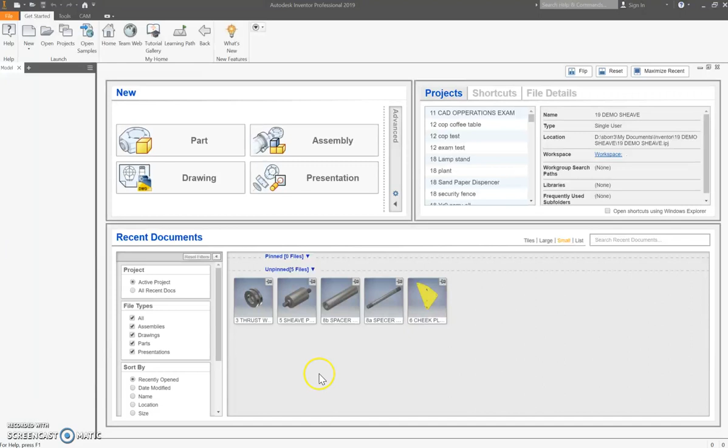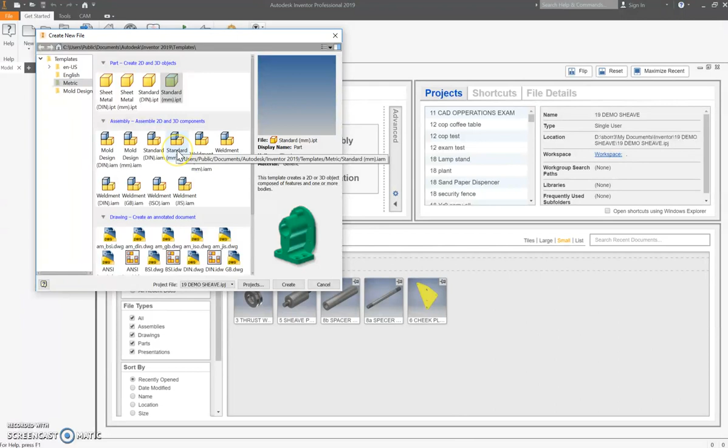Rightio, so we've got all our pieces for our thrust bearing and we need to put it together. So when we go up to New this time, we're going to skip down to the next section, which is assembly, putting things together. We're not doing a mold design, we are just doing a standard type of assembly. And like before, we had the millimeter IPT, we're using a millimeter IAM. IAM meaning Inventor Assembly.

When we come into assembly, you're going to get a few slightly different icons up here. Chiefly, you're going to have this assemble tab, and it will probably say place from Content Center initially. The Content Center is like a hardware store. It's got all sorts of nuts and bolts and bits and pieces you can use to put things together. In the lower half of that button, I can change to say I want to place items. So when you click on place, then it brings up your library in this project folder of all of the parts that you've been working on.

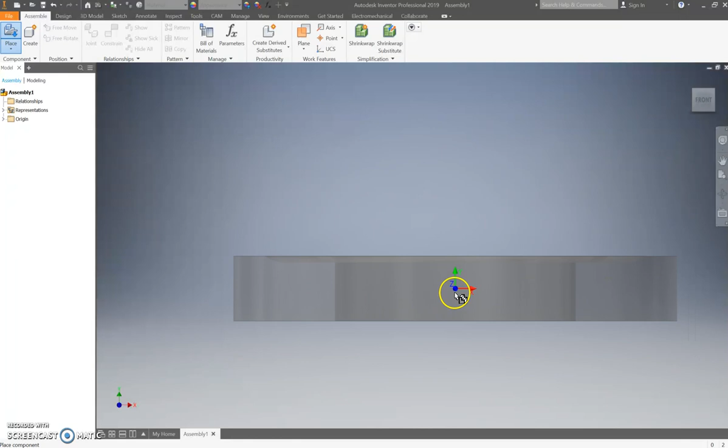Now, where are we? Okay. I want to first of all bring in the lower ring for my thruster. It gives you a preview of what it looks like. So I'm going to say, open that one, please. So initially, it's just got this floaty thing. If I click once, it has a bit of a think, and it drops one of them off. Escape button will let me escape out of there.

When you're rotating this around, get into the habit of using the view cube. I know there's a place where you can find a free rotate type of tool and it just lets you move anywhere, but it really messes up how it relates to this front view, top view, right hand view, and that'll have knock-on effects in your drawing sheets later on.

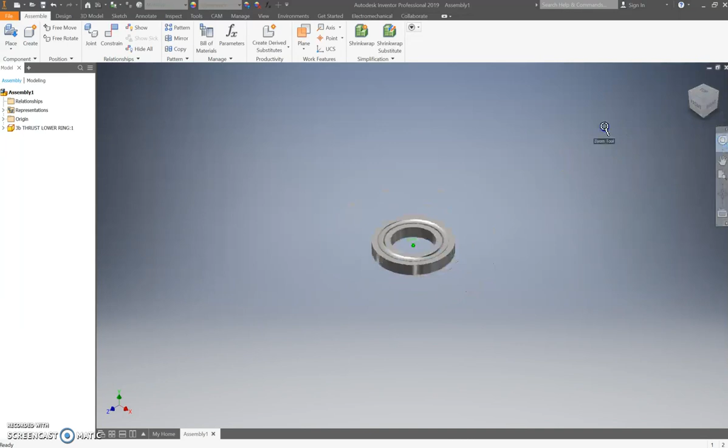Another handy tool to use is this one here on the right, the little navigation wheel. So it will let you zoom in and out if you have trouble with the roller on your mouse. The orbit, well, it links to your view cube, so you can spin it around and look at it from all sorts of fantastic angles, panning around and so on. Let you play with that one and work it out. I'm just going to stick with this one here.

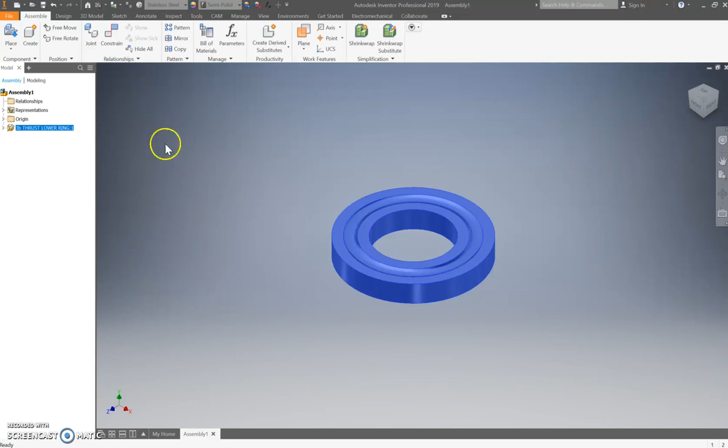At this point, this object can be moved anywhere in that 3D space. And I would like to lock it down so it is effectively sitting on a table and glued there. It can't move. To do that, I'm going to right mouse click on the icon for that lower ring, and down here near visibility, I want to ground it. So that one is locked in place, and all of the other parts I put in are going to connect to it and shouldn't be able to be moved away. Okay, so that's our base piece put in place.

Next, I'm going to place in the ball bearing. So here I've got my ball bearing, the thrust ball bearing 3C, and I'm just going to position one of those, just the one. And I'll show you why in a moment. First, I'm going to constrain it into place. So constrain is locking those bits and pieces in and looking at the relationship between different parts. There's a few different types of constraints.

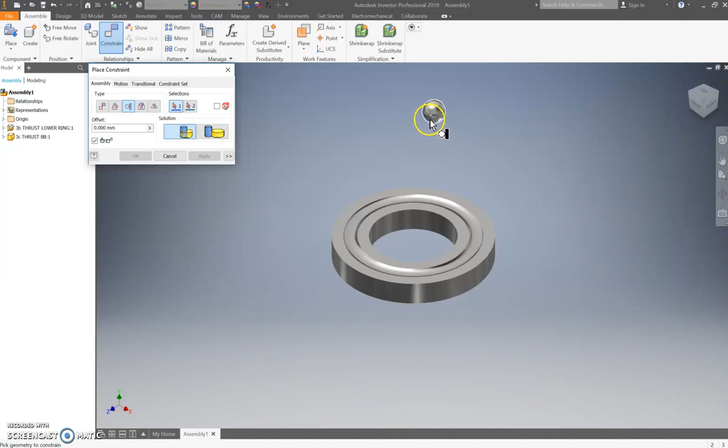For this ball bearing to fit a groove, we need to use the tangent constraint. So here you can see you've got a small pipe inside of a larger pipe. So it's an internal type of tangent as opposed to an external type of tangent. The one you tick will have that light hue of blue about it. So I want to take that ball bearing and put it into that groove. It makes a click sound to say, hey, I'll put this here. Do you want to do more, or are you finished doing your constraints? If you've got more to do, you click apply. If you're finished, we click OK.

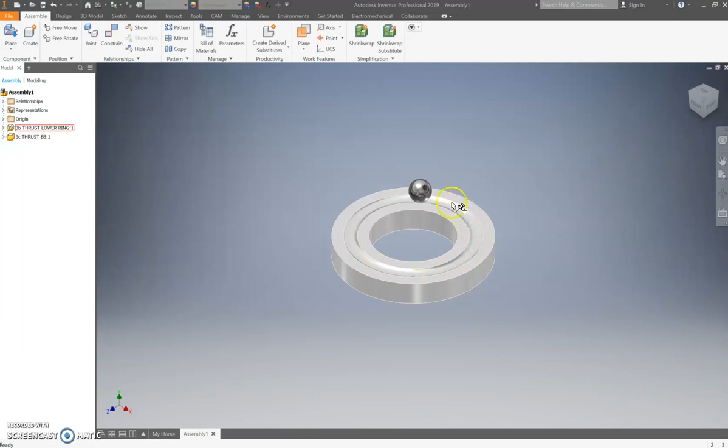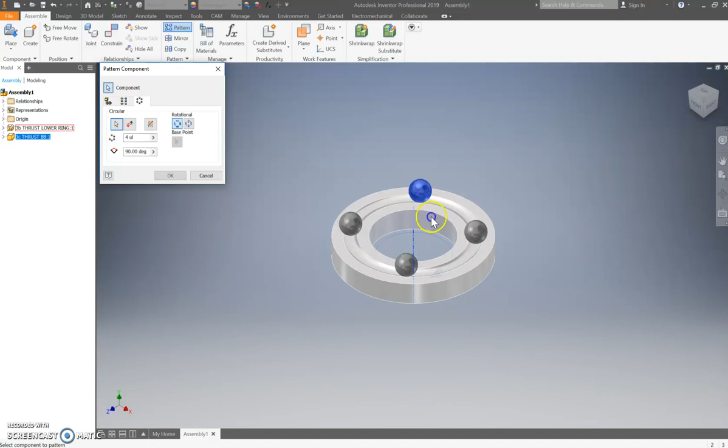All right, so that's one ball bearing. There needs to be ball bearings lined up all the way around this little groove. So I can pattern them around in a circular fashion. What component am I patterning? It's that one. What is it following? So I'm selecting the inside of that race. How many are there going to be? Well, I've had a bit of a play around with this, and I know that 16 fit quite neatly. And what is the degree of separation between each one? It works out to be 22.5 degrees.

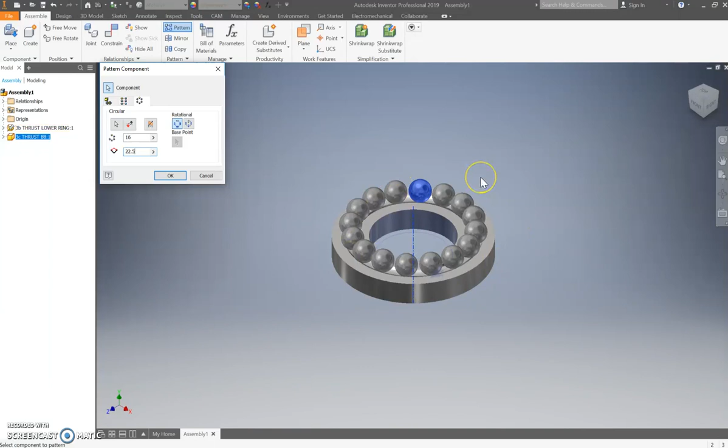I basically work that out by saying, well, I've got 16 of these. What's 360 divided by 16? My answer is 22 and a half. So when I hit OK, now my ball bearings are sitting in the groove and they're ready to go. Now, just need to put the one on top.

Really easy to do. We're going to go to place, find the piece I want to bring in, the upper ring, open that one up. And because I drew them in situ, it's already around the right way. Escape, I don't want more of them. Now for the constraint button. The constraint we're looking at this time is this insert one. So it's specifically set up for looking at how pins fit into holes, or different holes line up with other holes, just all cylindrical types of things.

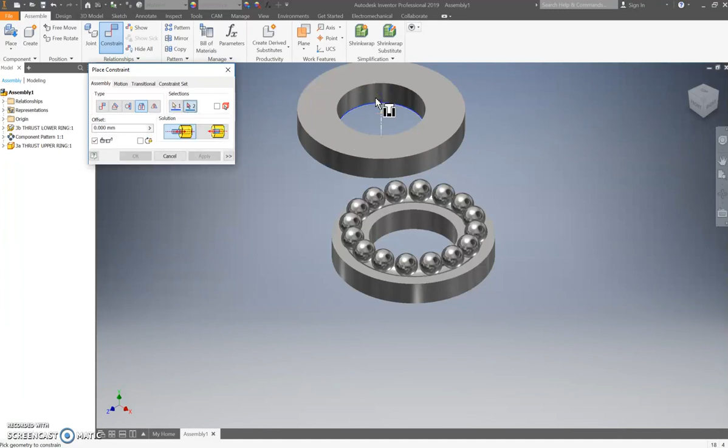We want it to be opposed. It's not like I'm putting a peg in this hole. That's opposed to the other one. The lower edge of that upper ring compared to the upper edge of the lower ring. Now it's going to put them all the way together. It's not quite smart enough to realize that there's ball bearings in the way. I need to create an offset between them. If we think back to when we did the drawing, we needed to have 8 millimeters in between the two, and they'd be in the correct place. So I'm going to hit OK there.

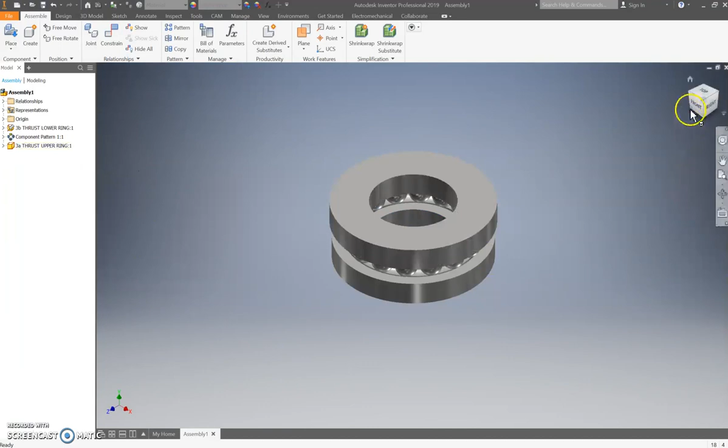We'll look at it from the front. You can see I've got the bearings and the top washer. The top washer is not constrained in that it should be able to rotate. Oh, I thought that should rotate. Anyway, there we go. We've got our thrust washer complete as a full 3D model, and we can put that, as a sub-assembly, into a bigger one later on.

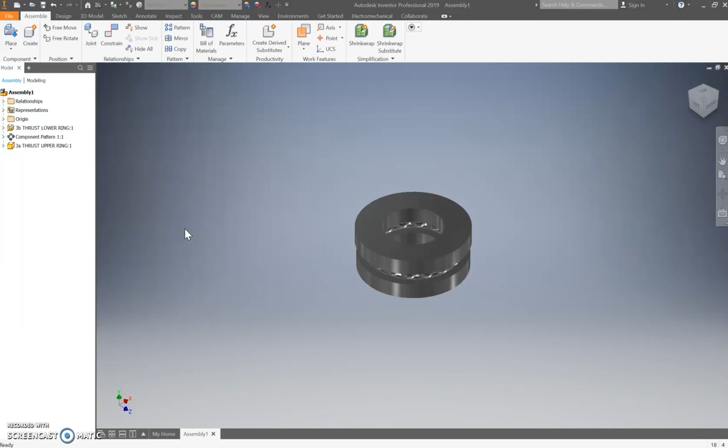This one, when you go and save this one, File, Save As, and we're going to call this, look here, I've already got it saved as the part number 3 thrust washer, ready to go for later. All right, have a crack at that one, and you might have to have a few looks at this. It can be a little bit tricky, so have a bit of fun with it and see how you go.